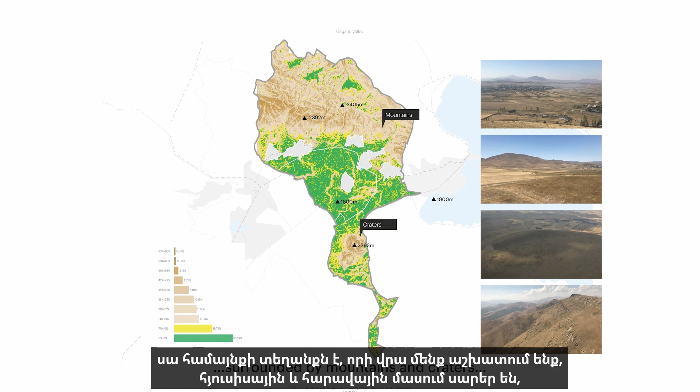Well, it's good and well located, close to Yerevan, in between Yerevan and Lake Sevan, on the way to Georgia. There's a train that could maybe run a bit more in the future to connect that. When you zoom in, this is the topography and the site of the community we are working upon. On the northern and southern parts, there are mountains, and in between, the valley with five communities.

It has a long history already. As explained, the researchers made a very close inventory of all the traces of the past, so that can be taken care of, not only to restore and improve it, but also to be inspired by it. When I go to some of your monuments in Armenia, in the south, you have beautiful chapels in the mountains, and then next to it you build this noisy restaurant. I don't get it, because the mystical part of such a component deserves sometimes a space. That's what we maybe can learn from it.

And of course there are more epochs that are there. That's what I love about the country, because, for better and for worse, you made this new kind of elements that combines with this longer history and leads sometimes to fascinating expressions of that moment.

It has, of course, also a lot of amenities already, built at different moments in time - schools and community centers that are taken into position. It has agricultural activities coming up, not everywhere, so that gives also space for development. And there are elements we could consider to help, in the near future, give that a space.

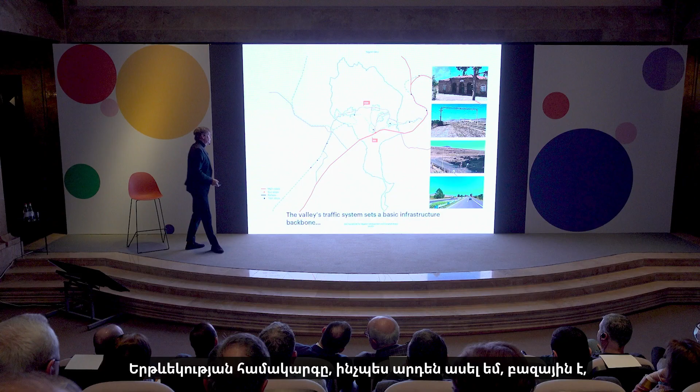The traffic system, as I already explained, is basic, with the main artery and the train that can be there, and the road system that is there. The climate is continental, mild, relatively dry, with cold winters as we have now, which leads to a combination of mountainous water and groundwater storage potential.

Okay, what's the ambition then to do? Here are some elements of how it was discussed to make this initiative and bring it one step further. It's clear it should be ecological, and to do that it should also attract people to invest and visit the place. There are places which are gorgeous and wonderful to be there.

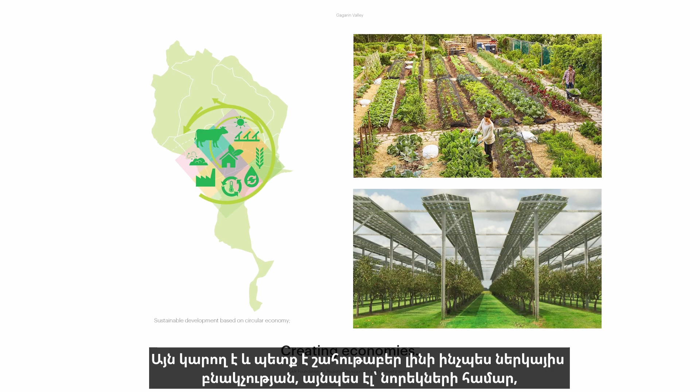It could and should create economies for the current population and for newcomers, maybe with new technologies, creating perspectives. This will attract people to be there, to stay, to work, to live, and to deal with it. That's the main source of making this valley alive.

Let's have a scale comparison for a moment. How big is this valley? Let's compare it with other valleys in the world. I'll take you for a moment to San Gimignano in Tuscany. If you look at our outline, in that way we could make a new San Gimignano in your area, if you wish.

If I take you to Napa Valley, a highly successful agricultural element, then you have the same size as a part of it. That gives something. If I take you to the Valle Central, the Central Valley of Chile, which is enormous, but just to look at Miguel Torres, one of the main characters of the best wines in Chile - that's his estate, what you could do.

Let me take you to Yangshuo, which I love because of its very special landscape that is there, and Yangshuo would fit in that sense to show you the potential.

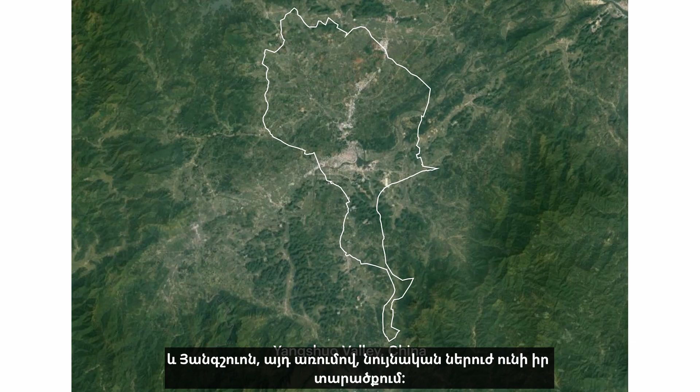Take Bordeaux, the area next to Saint-Emilion, and think about how that would fit. Or Jordan Valley, which has all kinds of political notions but is very successful in its agricultural project—a piece of Jordan Valley would fit in that case. Or the Sion area in Switzerland, or Spitz in Austria. It fits.

How can we work on that? First, we have to enhance and revitalize the current water system of the valley to equip it for this species. Some can do it already, some with less water, and we want to give it more flexibility and more potential—that's crucial.

So what can that be? It can attract a wide scope of people who work with it—people who want a specific species, who want to set up a small boutique hotel, people who want to live there. A combination of people could be there.

That can change the valley into something like this. Gradually, step by step, this beauty could be imagined, this pearl somewhere in the north of Armenia. And if you look carefully at these potential initiatives, already it shows this kind of archipelago, or mosaic of different gardens, that could be based on the current situation.

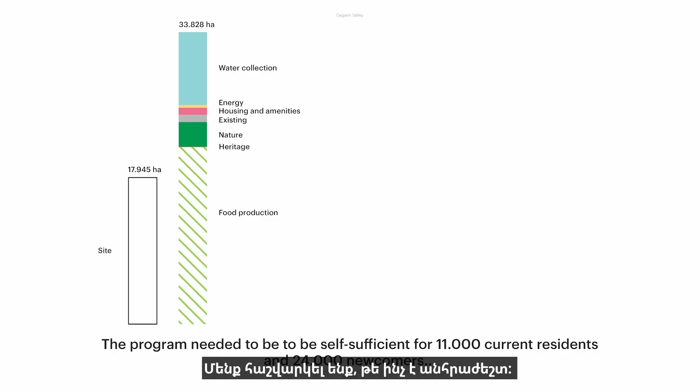So we did calculations on what to do. Imagine we have that amount of people and they produce everything for themselves—they need basically this amount of hectares. That is about double the existing non-mountainous area, just to give you an idea. That means we have to factor that in.

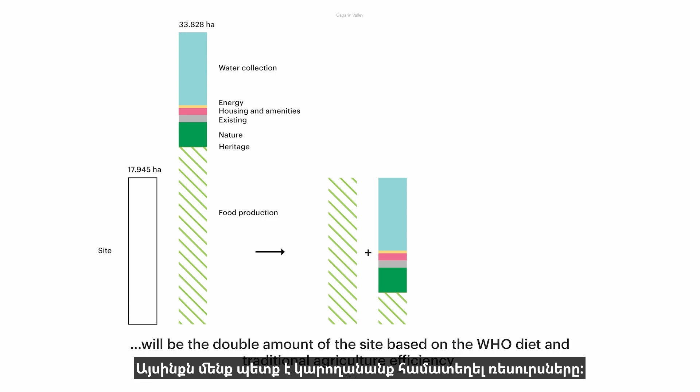Combinations are wonderful to imagine, because then you have to make solar cells and, at that moment, some kind of wheat to be important. That creates challenges, but also more integration. So you see some of the potentials we can imagine.

You can have energy-plus production. You can make houses and be natural, which you already do. That could lead to this kind of combination, an integrated system that will happen over time.

That means there are different cycles—water, waste, nature, agriculture, energy, and the economy—that need to work together to create this kind of new agro center, if you could give it a name. So how do we make this valley?

Then I come to the moment of visualization, to understand what it is. We made a model—when you entered, you saw it a little, but later you'll see more. This is how we built it in our office in Rotterdam, where people work on it, and we actually plant species and buildings into the model to make it visible.

I still love that mini film—it shows you immediately how things are, how you do it by testing it. I think this is a process that can come more. That model should be there; you should say something about it when that plot comes into action.

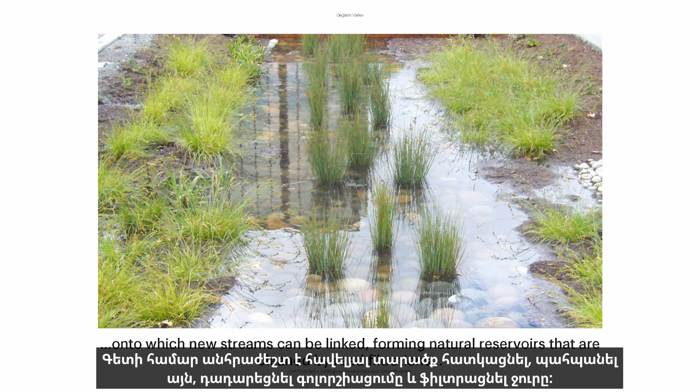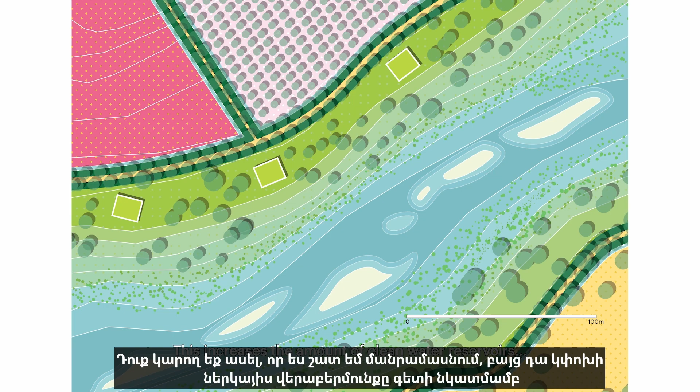Here's an image of that filtration, how we could do that, and how it can lead to zones that are sometimes water, but under the soil it will stay there with rocks and stones to keep it and protect it. I immediately go into the details, but that would change the current treatment of the river into something which I think is beautiful, and less only pragmatical.

This is a new pragmatism that I could imagine, and that leads out of a perspective that gradually turns into something like that.

Is it expensive? Costs a little bit. I need a bulldozer, and I need some extra soil on the soil bank, and then it's done. How long does it take? Well, if you give me permission, I will organize it, and it can be quick.

So here's how it will go through this model in our model. Next step is the water system further, if we did that. This gives an image of how there are current elements already in the underground.

We imagine different tools to make it, to have pieces where we can use plots for agroponics, to have catchment areas, not only in the river but also higher up, to filtrate it next to the roads in that way, but also to have a dripping system to avoid evaporation. A palette of elements is needed to guarantee these directions.

That means that from this map, we can start to make gutters on the edge of every plot. It's as simple as that, sometimes underground, sometimes halfway, and that can then be filled with water. They can be surrounded by plantations to reduce the wind, again to reduce evaporation, and to enlarge shading and biodiversity.

We can add some more reservoirs to keep the step system on the mountains and bring it then there. Together with the additional wells on the spots, we can do a kind of a lot already in the area. And then, last but not least, the recycling system of that water, bringing it back locally and in some parts in decentralized ways. That will allow for a good base of agriculture.

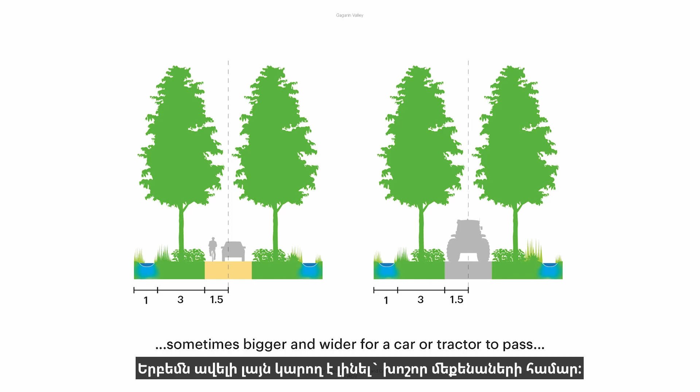The idea is, when this is the plot line, to make a path, to make these poplars, and to make the gutters beside it, and to reorganize the landscape in that way. Sometimes it can be bigger for a road or for a tractor to pass by. That means that every plot at that moment is accessible and we can steer its direction.

Sometimes we make it bigger for traffic reasons, and then we can start to dream about these kinds of elements. You use it already in that sense, and you do it in more places in the country. Even in winter, it makes sense somehow to work on that. What we can learn from that is basically it can form a majestic landscape.

It can make rooms in between for gardens and for plantations, with a variety of interiors that we could imagine. This would lead to characters that are already there, but now a bit hidden over the terrain, that form this kind of patterns.

And it means that you can walk around everywhere. It is like a fine grain. It's almost like a park that brings you to every destination with this simple technique.

That creates a network of paths based on the existing ones, extended with the plot lines, forming a very accessible level. We can make then also tracks.

We choose some of them to enlarge, to give a kind of routes for running or walking or certain trails. We can position certain kinds of public transport buses that come into this area, and other facilities for the pavements that lead to this healthier direction.

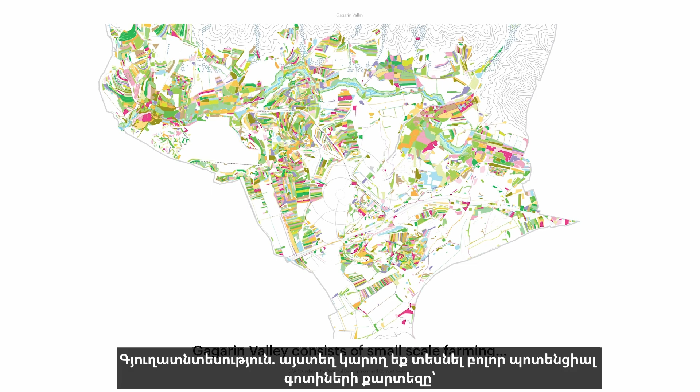And here you see a map of all the potential zones that are there, the small ones and the larger ones. Which is good, because that creates a kind of flexibility in time, from XS to XL.

We can negotiate, can talk, we can formulate collaborations, and we can imagine different species with different treatments and technologies at different sizes.

And that leads then to a possible infill of optimized elements, from grass to lavender to apple trees to wheat. You can find, due to that, the perfect situation.

And immediately, this sorting act leads to this kind of beauty with the tracks, the paths, and the plantation in between. I'll show you different images of what that landscape could be then in these gardens.

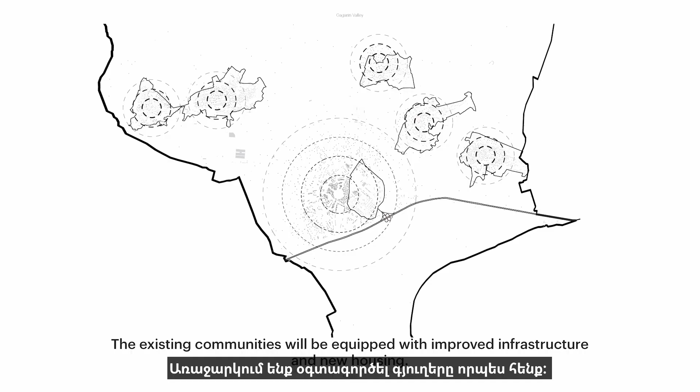Next step, housing. Of course, we talk about 24,000 new elements over time. So what we propose is to use the villages as a base. That's where you start. You make them slightly better, you add a little bit, and you emphasize maybe one of them, Gagarin North, because of the station there, to take more on board.

They will be dense in the heart and grow out into the landscape. So gradually they become part of these gardens or part of the farms that are in it.

So of course we need to make rules on architecture, how that can be. And we base it a bit on these kinds of combinations that are there, the stones and the green roofs.

About how to construct it in terms of wood or stone-like manners. But they should also open up more to enjoy the view and have a relationship with the landscape, so that gradually they become more contemporary, creating every time a big veranda, adding things where you love the landscape and the environment more than being enclosed.

And then, of course, the roofs are also something we would like to continue with. It means maybe that we can make more species. If you have a lavender garden, I make lavender on the roof. If you have an apple garden, we do apples on the roof. And that leads to amazing combinations.

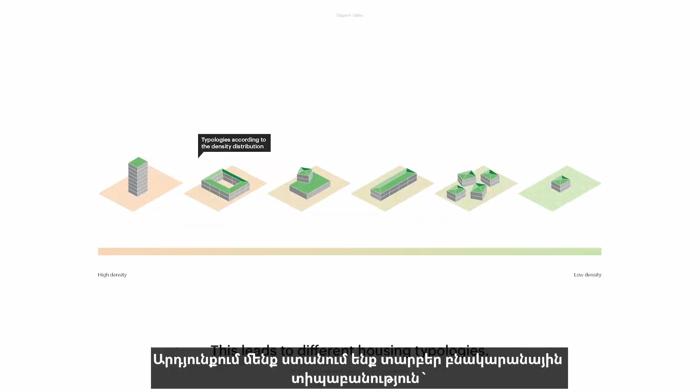That's what it is - from low density to village-like elements, to stacked variants on top of the halls, to more urban components. Why not, at a certain moment, play in this future, but give it character and quality, and have a committee that does that.

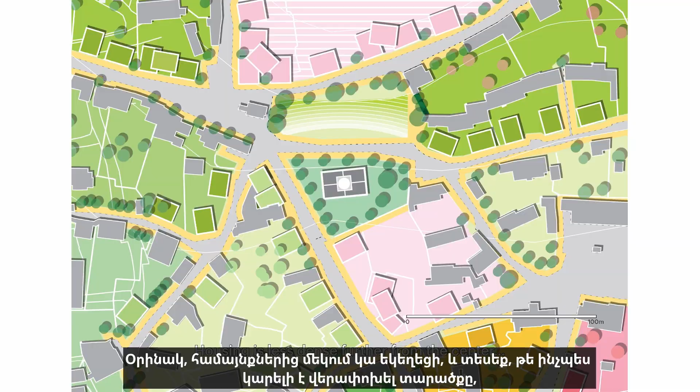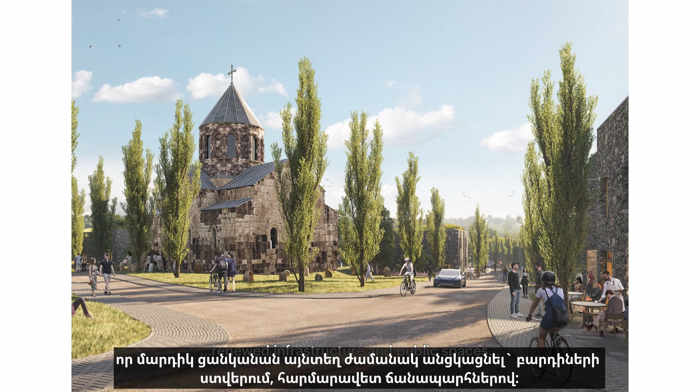Here's an example of the existing church in one of the communities, and how from this it could lead to maybe an area where you want to sit and stay around, where poplars are helping, where terraces are there, where roads are a bit reorganized as a starting point of that puzzle or mosaic.

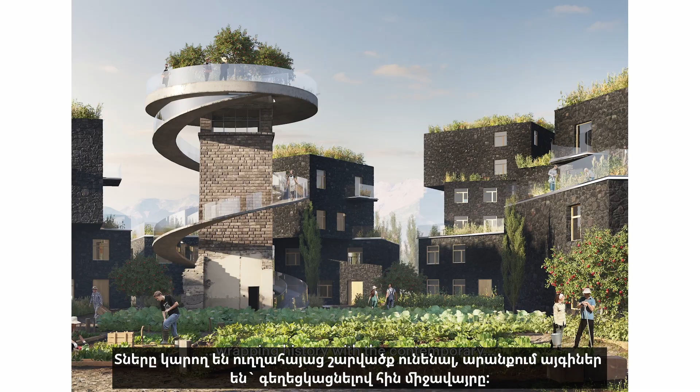And when it becomes denser in other places, say next to Gagarin, and you enter the zone with traces of the past, I could imagine that the houses are a little bit stacked, that gardens are in between, and that you start to love also the older parts at the same moment. That leads to these different interpretations juxtaposed to each other.

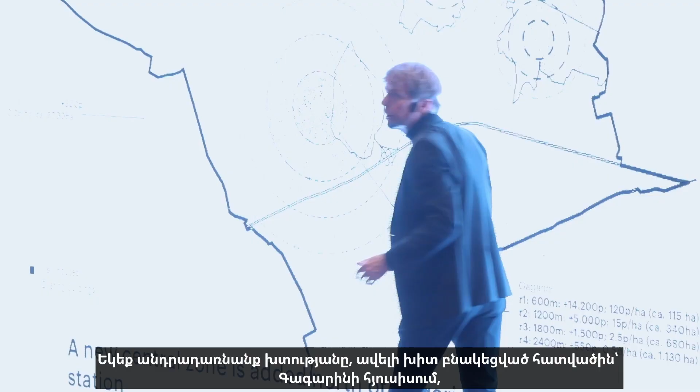I go into the density one moment, into the denser part, to the northern part of Gagarin, where the train maybe stops more in the future. And we propose that to maybe base there an anchor stone, or one of the most important anchor stones - say a park.

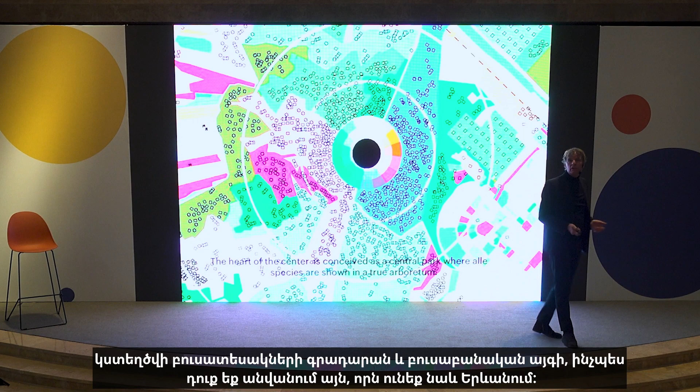Where we show all the species of the valley, and maybe of whole Armenia, ordered from A till Z as a kind of library of species - an arboretum, you call it, that you also have here in Yerevan, but that somehow immediately shows what you are doing, that you can walk around, you can see, you can learn from it, and it becomes this element surrounded by this density.

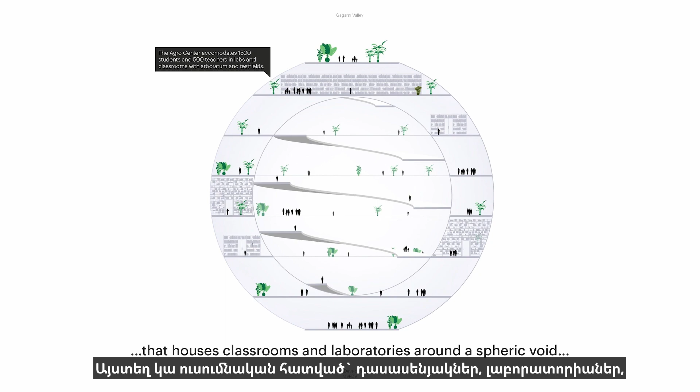That's also the place for the agricultural center, in the very heart, the epicenter of it. And what we imagine is when there are classrooms, you can, of course, put these buildings that you have here, but if you do it like this, then somehow they love being together. They create a space where they can meet, but also where you can show basically all the species and how the treatments are done. It could be, say, the best monitoring room of the valley.

Here you see what things are done. You can point it out, and with our current techniques, we can turn it into this kind of cave, or this data cave that can be at that moment there. And then it's surrounded with this arboretum, which is there.

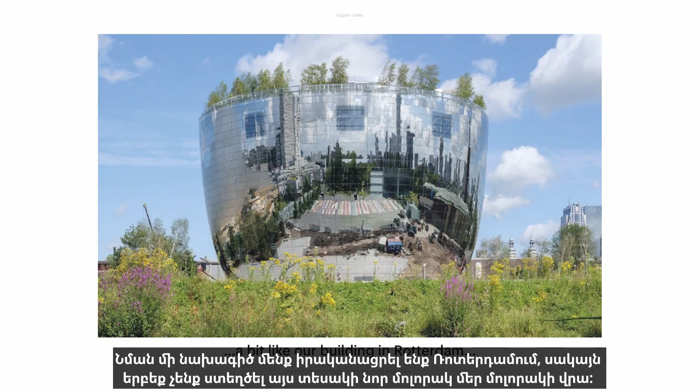And in order to make the arboretum a little bit bigger, we can imagine that we use material that reflects the gardens, and that it then becomes - we did it a little bit in Rotterdam, but we never made this new kind of planet somewhere on the planet before. So here they will be scientifically shown.

I think Gagarin would love that. Because he somehow thinks... he would, and it's a kind of anchor point that somewhere in the north this is happening.

It's like a dance floor of species, I would say. Illuminated, every plant with its own element, its own light, and you walk around and you are part of that species in that zone, and how it looks from above.

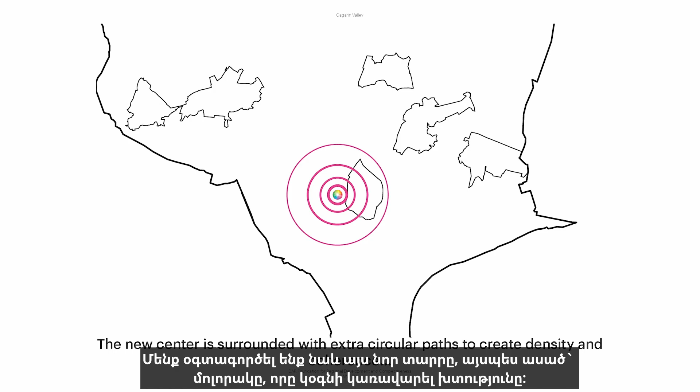We use that also, this new element, this next planet that we could imagine, also to surround it with an organization of density. We add - like when you put a ball in the water, tuck, tuck, tuck, tuck, you get circles of paths that surround it. Like this, or like this, or like this, can be imagined.

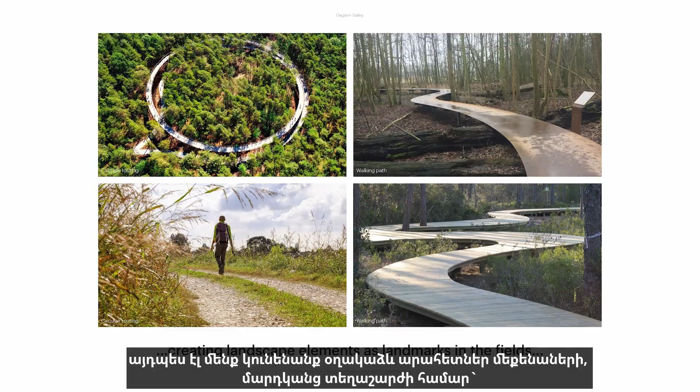And we use it for cars, we use it for people to go around, and that causes the circles of density over the existing plots, and that sorts out this denser part up till it becomes part of the landscape.

And then we filter it in with all the other kind of amenities - the schools that are needed, the boutique hotels, the places to work, the facilities, we call them.

And here they are not in one zone. That is normally what happens, I think, in the tradition of planning in your country. For more than 50 years, you made a zone for industry, a zone for working, a zone for living. I hope that this can be a potential to mix them in, because that has a lot of potential.

For instance, a commercial center. I hate those things in the edges of the city, that you have to go there into these malls. So why not put it next to the center and use basically the same typology of houses, combined into a kind of world where you can shop but also live in the same moment.

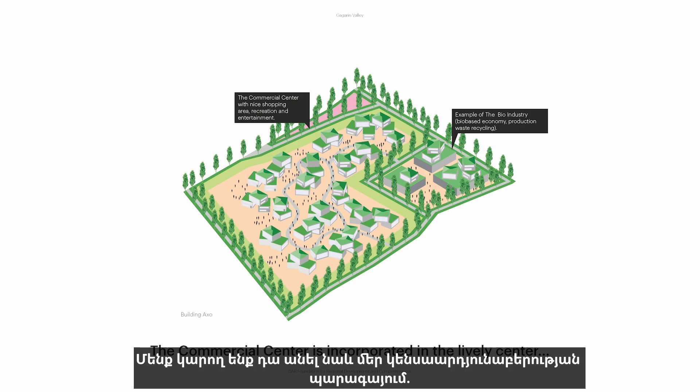We can do it also with our bio-industries, because there will be more than only plants. There will be places where you store it, places where you turn it into soup or into recycled products. So how to combine that with that task?

And we can imagine that we develop a catalog of beauties by that - not the stupid IKEA halls, but this kind of elements that you would like to see from a distance. But I can also imagine that they are like a piece of the landscape, continued over there.

These roofs, they don't use them too much, but you add maybe like a house for your grandmother next to it, or you live on top of it, or somewhere in the gardens, and immediately it's more lovable. It has no backsides in this, and it's there.

And say, wow, this is actually good advertisement of a certain kind of product that could be imagined. Or can Jeff Koons be part of our operation and make these fantastic apples in some of the gardens in that way? Or can we make even the biggest glass house in the world out of that industry?

Or a mushroom farm that becomes like a hill almost, where you have in the interior, mushrooms there. And I get this kind of collection of interpretation.

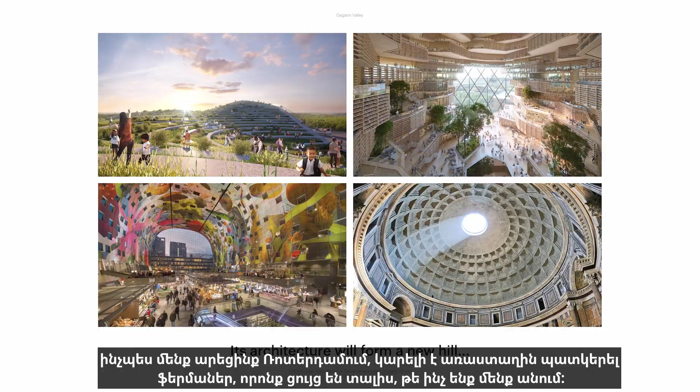This is what we did in Rotterdam. Something like that could be imagined with this hall, and farms on top to show what you are doing. It becomes a key connection between the landscape from the highway and the city center, making landscape in the third dimension, so when you're on the highway, you know where you are.

So here we can go further. The art center was also a dream, to have close to the center, next to the station somehow, a plot where we can imagine more artists working on the issue of food and turning that into a regular biennale, or a regular way of working on design with the different farms that are there.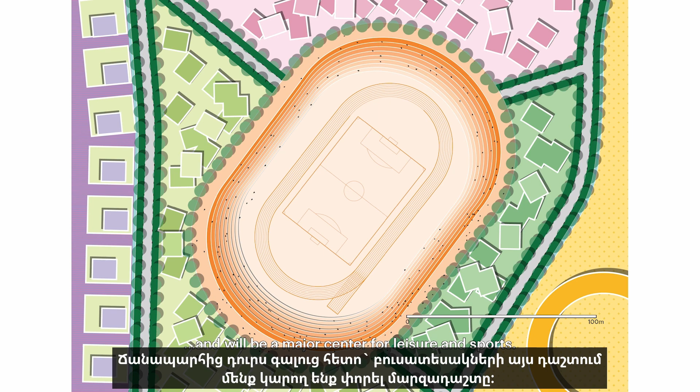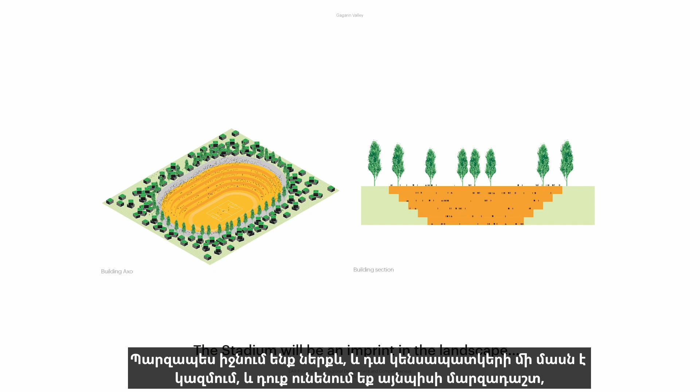Of course, sports is one of the parts of the program we could imagine, and how to make a stadium in that sense. Somewhere after the off-ramp, in this field of specific species, we can dig a stadium, going down as part of the landscape, so you have a kind of stadium you can also use during the day for your kids to hang out. Again, a garden-esque element, but we can continue with that.

And that turns into this dream - how during the night and the day, you see the species on the roofs, you see the artist colony, you see the gardens by the forest, and a drone flies over it.

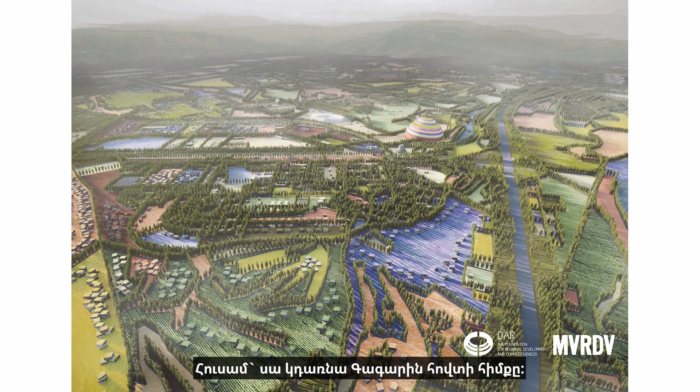Of course, we have to work on this together, and that hopefully gives a base for Gagarin Valley, and this is the concept master plan. Thank you for your attention already.